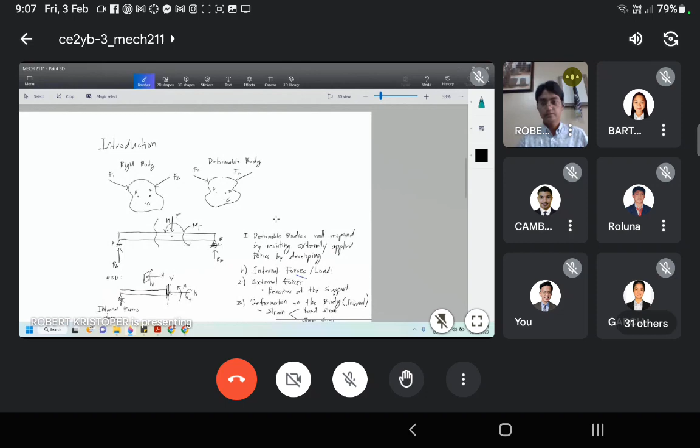Class, are you seeing my presentation here already in Paint? Class, can I have confirmation? Anyone, can I have confirmation? Are you seeing this presentation in Paint? Yes, sir. Yes po. Okay, so now for an introduction,

last semester you had the course Statics of Rigid Bodies. Meaning, based on the given forces or external loading applied to the body, we assume that the body will be rigid, meaning it will not undergo deformation regardless of the support condition. When we say support condition, let's say for a truss, there is one - it could be a roller, a hinge, or any pin-connected support, and then it will have a reaction.

And then later on, if you can recall, we compute for the forces acting on the member, which are internal to the member. For a truss, we do the method of sections, so we can make a free body diagram and represent the internal forces.

Now, as in statics of rigid bodies, again, we assume it to be rigid, meaning there's no deformation. So for this figure on the left, these points A, B, and C - meaning if the body is rigid, it will not deform, the location of these points in this certain body will not change.

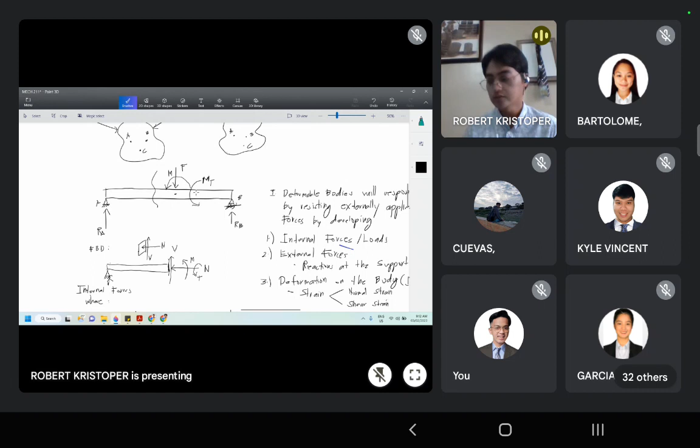It is simply supported with a hinge or pin here, and a roller on the right, at point B. Now class, if it is loaded with different types of loading or externally applied forces, for example, meron tayong concentrated load of force F here, then meron tayong bending moment here applied at this point, then meron din tayong torsional moment which will be discussed as a separate topic.

So imagine this is the beam. This is the externally applied forces - this is the concentrated load, then this is the bending moment. When you say bending moment, it bends the member. Now when we say torsional moment, represented by M sub T here, it is the twisting moment on a certain bar or body or structure.

Now if we are to analyze the effect of this externally applied load on this structure, ano mangyayari? Siyempre may support condition yan. Magkakaroon ng reaction here, RA and RB. Okay, and still that would be external to this particular body or member here, the beam.

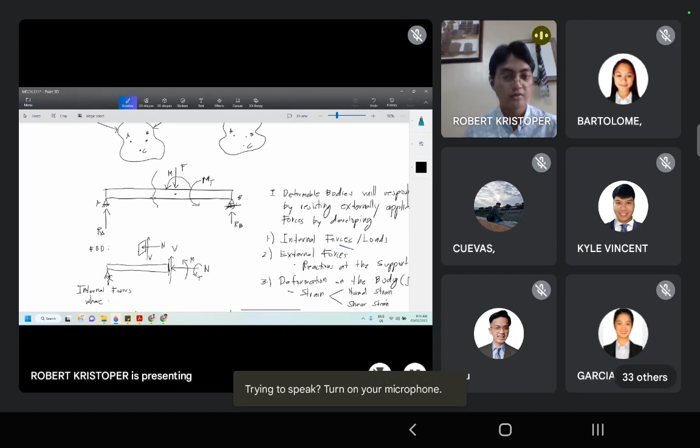Now if we want to know or represent the internal forces acting on the body, then ano ginagawa natin? Doing by producing here a cutting plane. When we do this cutting plane, actually this is a method of section. Ano mangyayari? Refer to this figure below. Okay, if you cut that section here, what you will be seeing is what?

Okay, an axial force here represented by N, or a normal force. So we say it's normal force or axial force, simply normal force, kapag perpendicular yan to the section that we are analyzing. In this case, let's say this beam has a rectangular section. Now let me zoom this one. Then the normal force is perpendicular to the section being analyzed here.

So parang imagine nyo na lang class na magbigay tayo ng isang reference. Let's say itong braso ko - now I will be pinching or I will exert pressure here. So it represents the externally applied forces here on my hand. If we are to check, guys, are you seeing my illustration here, by the way, on my hand? Yes po.

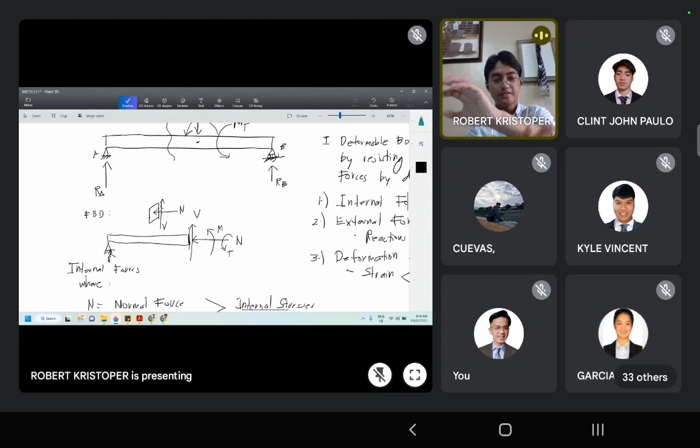Okay, so imagine ito yung external forces applied to this. Let's say ito yung body, okay, this is the member. Now if I press this tightly, if I want to check the effect of this externally applied load on the internal body, I will be cutting this one. So imagine na pinutol ko itong kamay ko. Ano mangyayari? Ano makikita mo? Diba, you will see the cutting section here.

Makikita nyo, pwedeng sumirit yung dugo dyan, may pressure, pwedeng tumagas yung mga laman dyan, and so on and so forth. Meaning, merong effect yung externally applied forces on the internal body, or meaning on the bodies internally.

Okay, so in this case, if we are dealing with any type of structure, for example a beam, if we produce a cutting section here or a cutting plane, then you will be seeing the internal forces effect produced coming from this externally applied load. And as you can see, of course, normal force on the cutted section here, perpendicular to the section, and itong V here, it represents the shear force, or a vertical force that is parallel or tangential with the cross-sectional area.

Now, how about the moments here, represented by - this is bending moment, then this is torsional moment. Go ahead, what is that? Do you have a question?

So, sige, acknowledge. Now again, we're discussing section here with the method of section. Ano makikita nyo dyan? Internally with the member, di ba? Again, bukod sa normal force and the shear force, action, reaction - kung may applied bending moment here, then magkakaroon din ng reaction na magkakaroon ng bending moment at the member internally. And also, kung merong torsional moment here, magkakaroon din ng internal forces with this particular cut section, to resist or develop dahil nga sa externally applied forces.

Okay, so again, the representation here for N is the normal force perpendicular to the section, or the cross-sectional area being considered. Then for the shear force, this is perpendicular, or this is parallel, to the cross-sectional area. And of course, bending moments that you are familiar already.

This is new to you, the torsional moment, which is a twisting moment, or the twisting on any body being subjected to it. So again, these are internal forces, and these forces will produce internal stresses to the body.

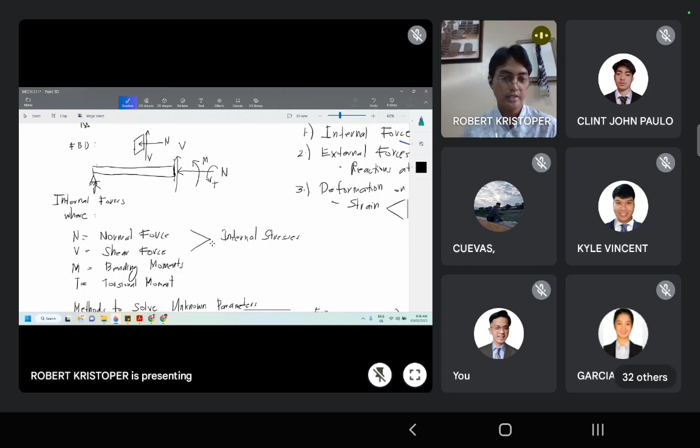So now, how can we solve those unknown parameters? Again, what are the unknown parameters?

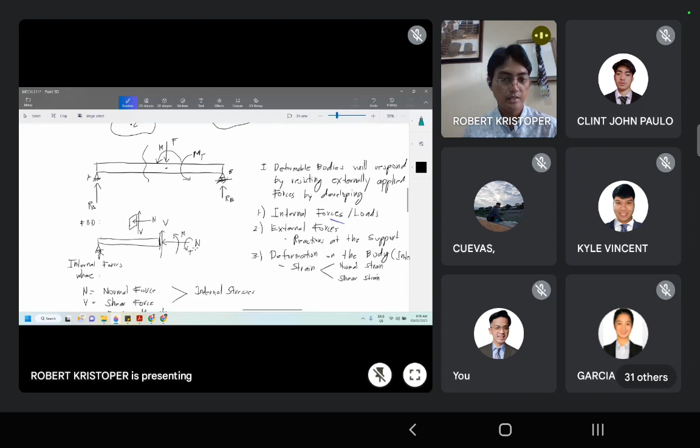Let's reiterate. If a body is subjected to an externally applied load, say for a beam, then depending on the support condition, there will be a reaction, which is still external to the body. If we are to analyze the effect of externally applied forces to the body, we have to draw a free body diagram by producing a cutting section using method of section. Then you'll see the internal forces or loadings on the body represented at the section, or cross-sectional area of any member or body.

Now, how can we solve that unknown parameter? The reaction is unknown, which can be computed using statics or equations of equilibrium. These other unknown forces or parameters, which are internal to the body, can also be solved using equations of equilibrium. What do we have in equations of equilibrium? That would be summation of forces vertical, summation of forces horizontal, and summation of moment.

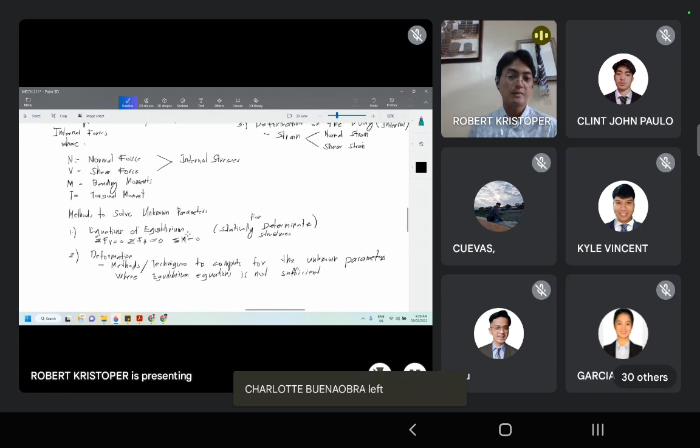Now, if it happens that there are more unknown parameters compared to the available equations, we simply call it a statically indeterminate structure. In most cases in our study of statics of rigid bodies, the structures are statically determinate, meaning the available equations from equations of equilibrium equal the number of unknowns, whether it's a reaction or a member on a truss. They're equal, so it's solvable or determinate.

Now, if there are more unknown parameters than available equations, it will be statically indeterminate, meaning the equations of equilibrium are not sufficient. Here comes the help of our study in mechanics of deformable bodies, when we study deformation. Because if the available solutions from equations of equilibrium are lacking, we have different methods or techniques to compute for unknown parameters considering deformation. So we have different methods in addition to equations of equilibrium.

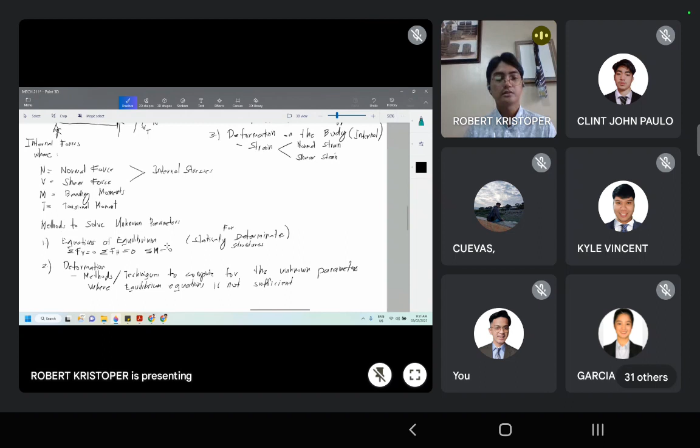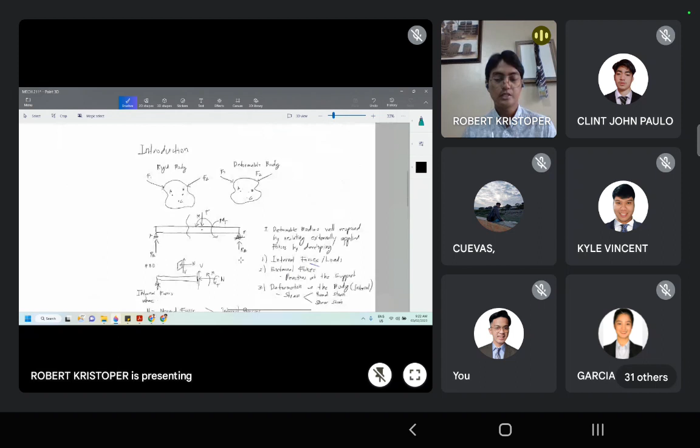That will be the focus of our study, I think around the midterm. But still, if it's solvable with available equations from equilibrium conditions, then we can do that. Now this is only an introduction, by the way, so let's jump straight to our official discussion, which is all about simple stress, particularly normal stress.

Okay guys, are you with me with this presentation for normal stress? Class, can I have a confirmation?

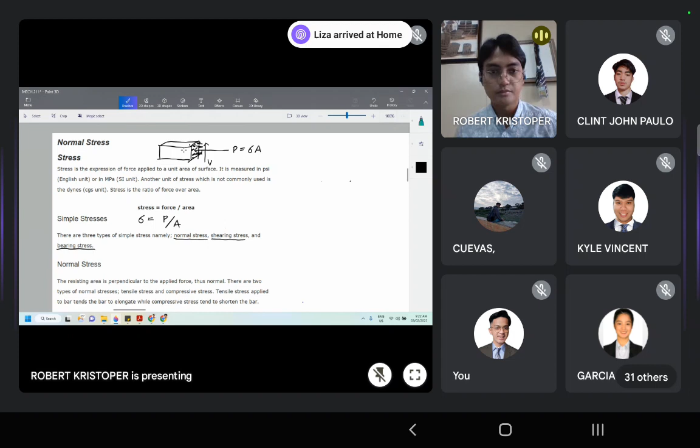So for the normal stress, for example, let's say this is the beam earlier, and then we produce a cutting section. What you'll see there is a normal force and shear force, typically, unless there's a restriction on the support, and there's a bending moment. But now for the study of normal stress, under simple stress, imagine this cross-sectional area here.

Imagine this is my palm. Again, if this is applied with an axial force, applied to the center or the centroid of my palm, which represents this area, this force is again perpendicular to this area. And also, this is assumed to be applied at the center or the centroid of my palm, or an area, in order to produce equal stress distribution on my palm.

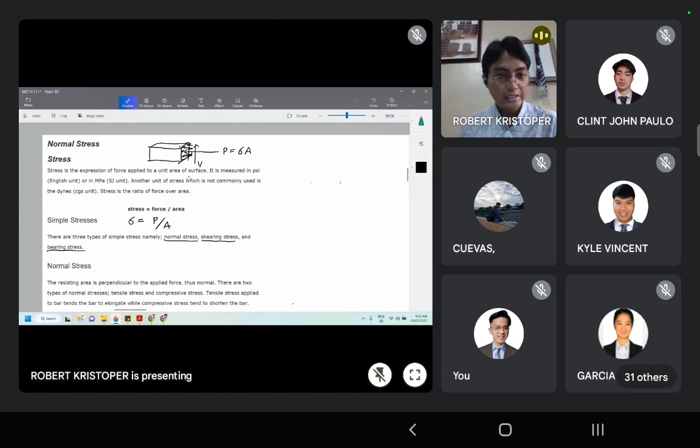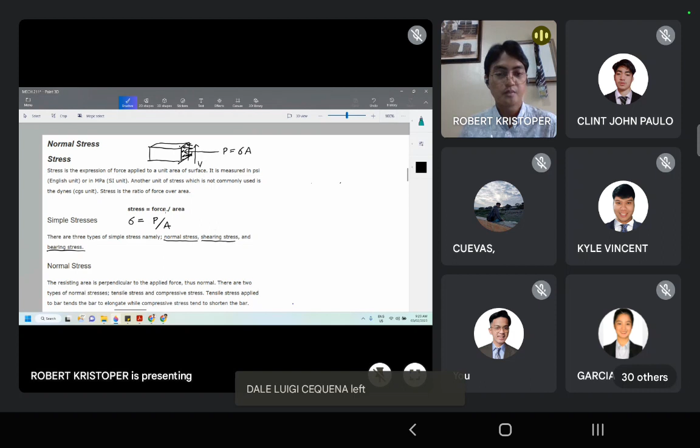Now, with that, the formula under simple stress, particularly normal stress, is what? Stress is equal to force over area, meaning it is a ratio of a force over area. Now, what are the types of simple stresses?

So once again, this is what we're discussing. Normal stress - take note, the force is normal and axial to this particular body, or let's say a member of a structure being subjected to stresses. Now for the shearing stress, the force being considered here is parallel with this area. And for the bearing stress, we will be tackling this one after shearing stress. But for now, let's focus here on normal stress.

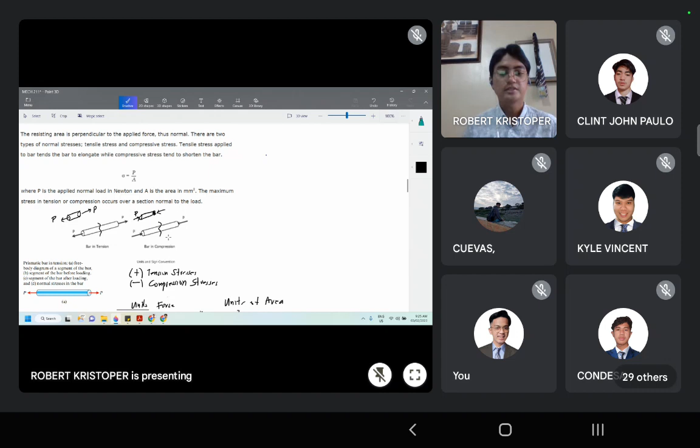We do first unit analysis on stress. Class, what are your known units of force? Anyone? What are the units of force that you know? In English system, what do you know? Newton, okay, what else? Pounds, and kips, and that's the unit of force, right? Newton, pounds, kips. So 1 kip is equal to 1,000 pounds.

Take note, class, this unit conversion - that's for the unit of force. And then we have units of area - square meter, millimeter square, and inches square. That's the typical one, okay?

Now for the units of stresses - again, stress is the ratio of a unit force divided by an area being considered, for an effect of a stress. So that will be unit force over an area. So let's say Newton is the unit of force, that will be Newton per meter squared. And take note, guys, Newton per meter squared represents Pascal, Pa, or Pascal.

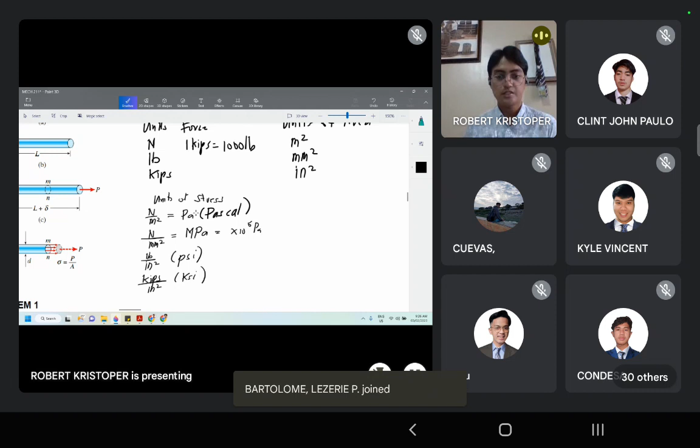Now, Newton per millimeter square is megapascal. And mega, class, in our scientific notation with prefixes - M represents what? The symbol represents times 10 raised to 6, right? So M here, megapascal, times 10 raised to 6 Pascal. So let's say you have 5 megapascal, then that would be 5 times 10 raised to 6 Pascal.

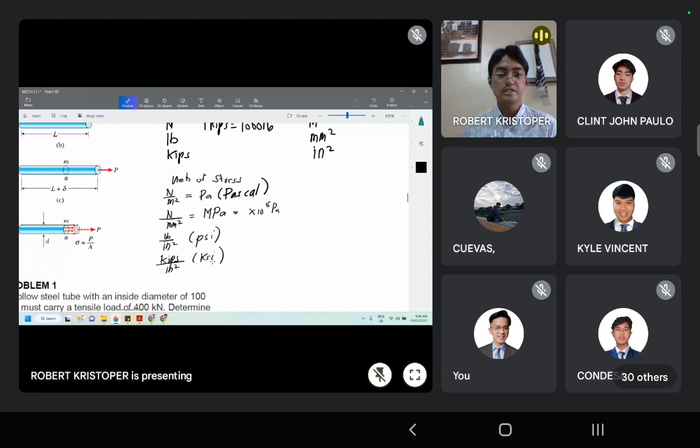Okay, so how about in PSI and KSI? So we have here pounds per square inch - in case your unit, in English system, for stress. Then kips per square inch represents KSI. So in case you encounter those units for stresses.

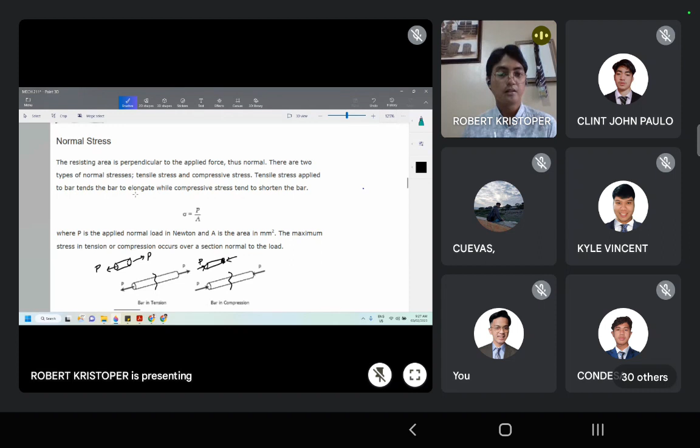Okay, let's continue. Now, the important note to take away here is that under normal stress, the resisting area is perpendicular to the applied force, or meaning normal. So class, take a look at this figure.

Now, let's say this bar is being subjected to two forces on both ends. So if you look at that, it will produce the bar to be subjected to tension. Whereas on this, on the right photo here, if it is applied - imagine this is the ball pen. Of course, if I pull that, that will be in tension. That's on this left figure.

Then on the right - if I compress that, let's say I push this, right? It will - this pen will be subjected to compression.

Now, I know for sure you are familiar with this one on our analysis of trusses, but okay, now if we produce a cutting section here, we'll see this. On this area, there will also be an equivalent force P to react on this externally applied load. If we cut the section here, then it will what? It will have the same value of reaction here on P.

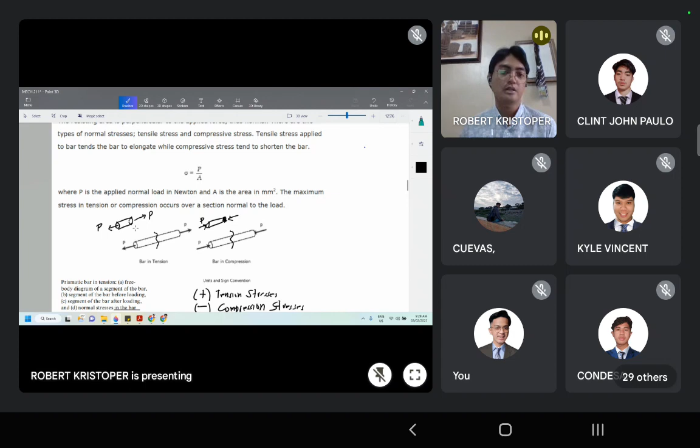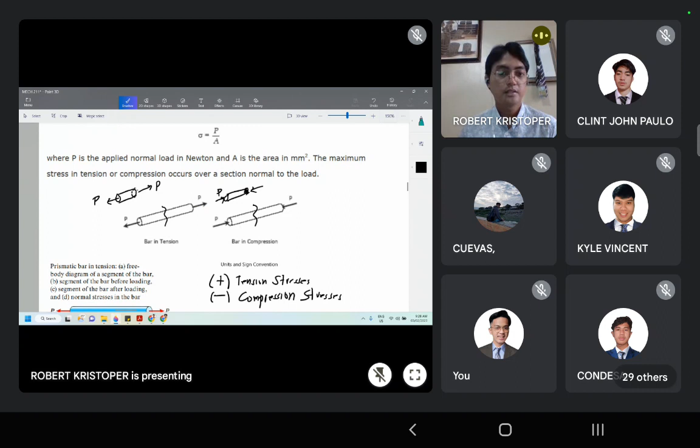So take note, action, reaction - equal. And if you apply equations of equilibrium, summation of force horizontal - this is going to the left, then of course, this is going to the right with an equivalent magnitude of force. Okay, now take note, this force P here is normal to this area being considered, meaning this body is subjected to normal stress. And again, the formula is that stress is equal to P over the area here.

So let's say it's a circle, right? What's the area of a circle? Pi over 4 d squared. What is the value of P here? That's given. Okay, so later we will have an example with this one. Now class, if you are to consider also, of course, as I have told you...

Depending on the applied force, a certain body will deform. Let's say on this bar we apply a pulling force or tensile force here at both ends. What will happen? This bar could elongate - this represents the deformation here. L represents the original length, and delta represents the additional length produced by this externally applied force.

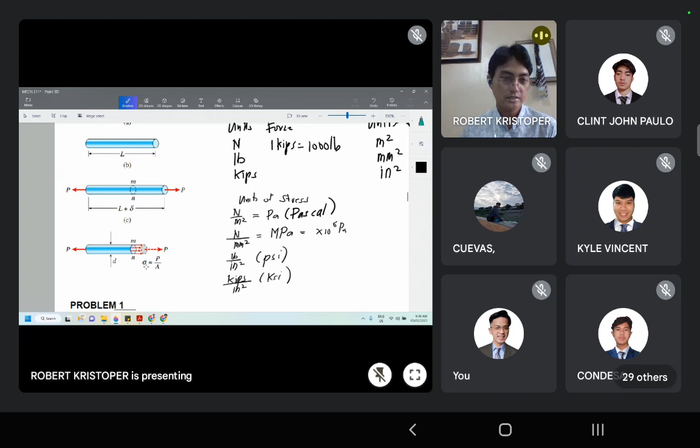Once again, if we produce a cutting section here using methods of section, you will see the force of section being considered. With this externally applied load, considering the left portion of a free body diagram, internally the member or body develops a reaction. In this case, it is equivalent to this particular magnitude of P, and this P is internal to the body. And normal stress is equal to P all over A.

Okay, so let's have an example to apply these concepts about normal stress. Class, are you with me with problem number 1? Okay, so prepare your calculator. I will be asking your participation.

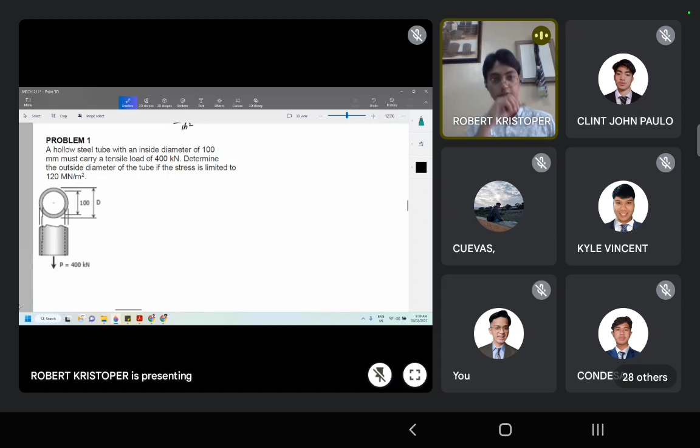For problem number 1, a hollow steel tube with an inside diameter of 100 millimeter carries a tensile load of 400 kilonewton. Determine the outside diameter of the tube if the stress is limited to 120.

What does M stand for, class? M stands for mega, right? So this is 120 megapascal. And 120 megapascal - what does that represent in units? Unit force per area? 120 what? Newton per what, as the denominator? 120 what, class, as the denominator? Millimeter squared, sir. Okay, anyone can participate, class. There's no incorrect participation, so don't be shy to participate. So 120 Newton per millimeter square.

So that's correct. Now, what we need is that the units should be consistent when we substitute into the formula. Again, what's our formula for normal stress? Take note, this is the force actually loaded and the area being considered.

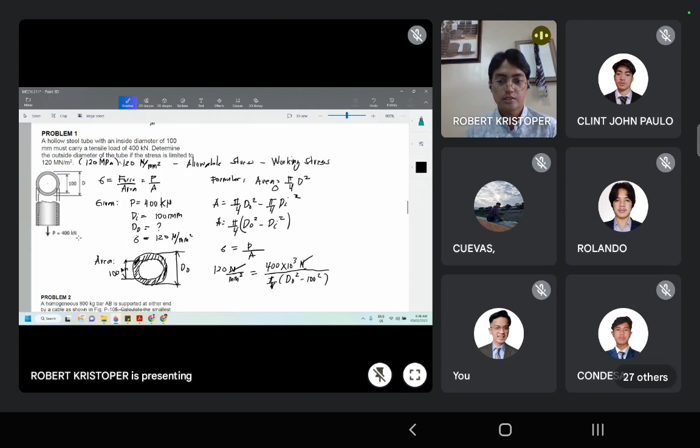Now class, you can just do a direct calculation, you can use shift solve, but let me simplify this. I mean, let's arrange this one so you can see the complete solution.

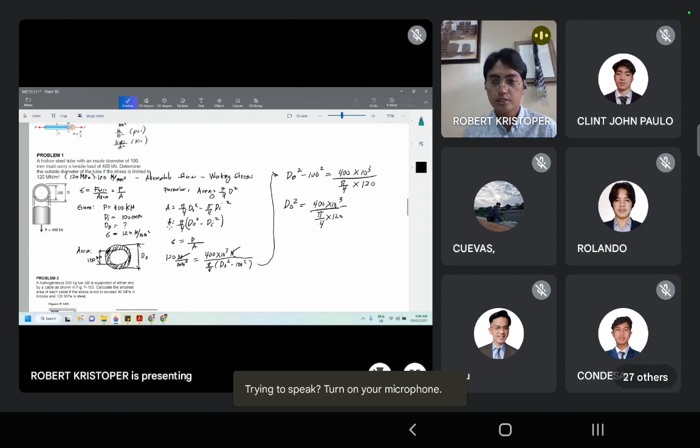Cross multiply. Let's separate the unknown, which is D sub O. That will be D sub O squared minus 100 squared is equal to 400 times 10 raised to 3, divided by, of course, the pi over 4 remains there, times 120. Then D sub O squared, that's all that remains on the left hand side of our equation. That will be 400 times 10 raised to 3 over pi over 4 times 120. And transpose this to the other side of the equation, it will be plus 100 squared.

And square rooting both sides, that will give you already the value of the unknown diameter here, or the outside diameter of the hollow tube. Guys, can you give me the value of D sub O here? By the way, you can right away do shift solve if you want, using the power of your calculator. But I'm considering this one already a solution in case that's required. But it's easier to compute this way.

Since it's squared, calculators sometimes have difficulty when there are squares or cubes in the unknown, because the analysis is no longer linear. Okay, so can you give me the value of the diameter here in 2 decimal places?

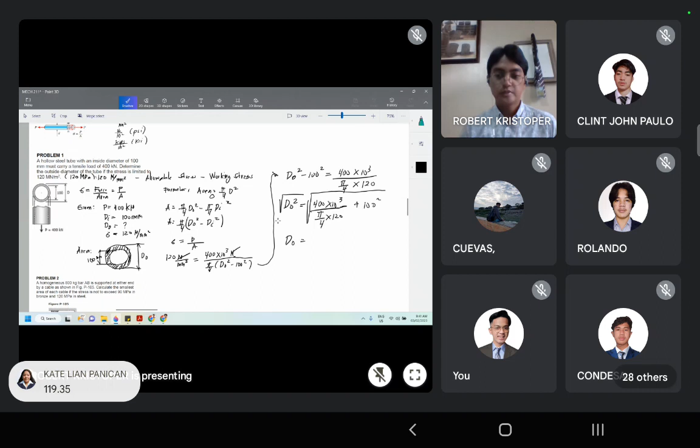Guys, what did you compute? Go ahead. How much? Can you speak? 100? Or can you verify this? 119.35? Same? Anyone? Yes.

Okay, so 119.35 millimeter. Now class, what is the conclusion here? That if 120 megapascal is the allowable stress of this hollow steel tube, meaning if you are to give this to manufacturing, what diameter or dimension of the tube would you specify for fabrication? So at least, it should not go below 119.35. So let's say this will be manufactured, that should be at least 120 millimeter and more.

Because if that becomes smaller, what will happen? The smaller the area, what happens with this equation? The stress becomes larger. So meaning if that becomes smaller, there's some possibility that this hollow tube will fail if you reduce the outside diameter, since the 100 millimeter inside diameter is already given. So again, the takeaway here is that the allowable stress is also the limiting stress or the working stress that we are referring to when we are dealing with the strength of this particular material.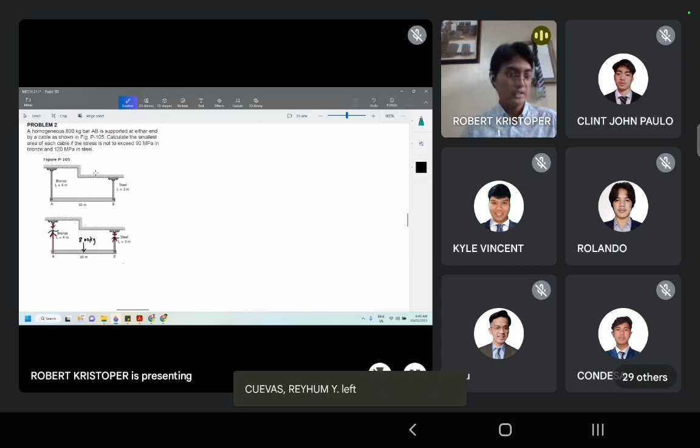Class, can I have confirmation? Go ahead, can you confirm? Dito po, sir. Okay, so this is problem number 2 already.

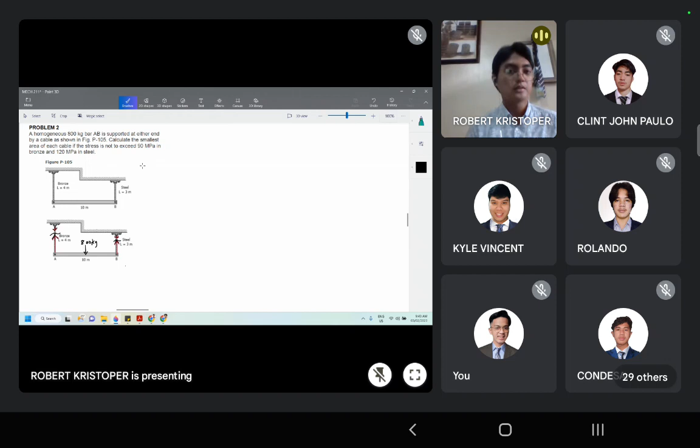Let's continue. A homogeneous 800 kilogram bar, AB, is supported at either end by a cable as shown in figure P-105. Calculate the smallest area of each cable if the stress is not to exceed 90 megapascal in bronze and 120 megapascal in steel.

So again, class, this is the homogeneous bar supported by this cable. This one is made of bronze, then this one is made of steel. And again, the strength of bronze and steel are different, meaning the allowable stress, or the limiting stress, is limited only to 90 megapascal for the bronze and 120 megapascal for steel. The given lengths and dimensions are also there.

Now, how can we solve this particular problem? What we're looking for here is the diameter for this cable to carry this bar with a given weight of 800 kilogram, and it should not exceed its allowable stresses which are 90 and 120 megapascal. Because if it exceeds the allowable stresses, what will happen?

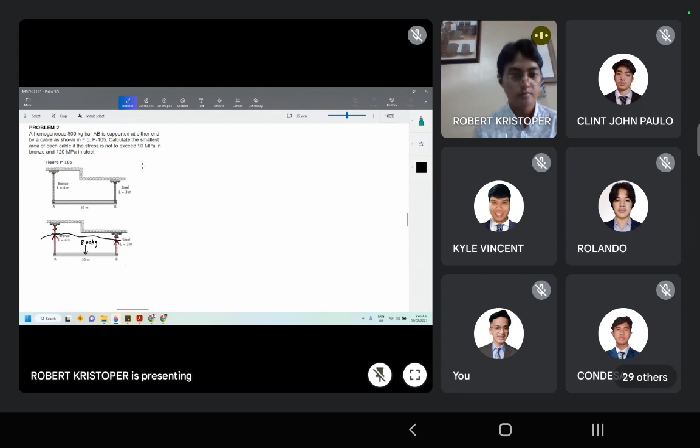So, of course, to see the internal forces acting on the cable, we produce a cutting plane here, or a cutting section, using the method of sections, and we interpret that into a free body diagram. Let's say I introduce a cut here, so this is what remains below. Let's reproduce a horizontal cutting plane here, and then what you will be seeing are the internal forces acting on the member, and then for the cable as well.

Of course, action-reaction, class. This bar AB has a weight of 800 kilogram, located at the center of bar AB. So when we cut this one, we will see the internal forces acting on the member, which is the cable. And then, of course, if we transfer this force, by action-reaction, opposite direction but equal in magnitude, this particular tension equates also to the tension applied on the support.

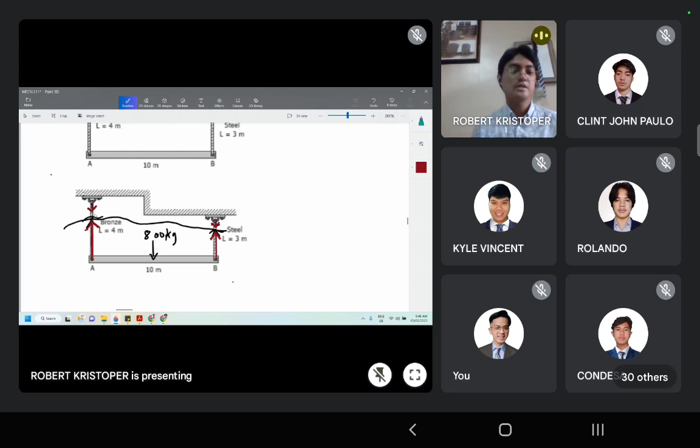So now we will be considering only the lower portion of this particular cutting plane. We draw the free body diagram. Okay, that's our free body diagram. I hope you already know how to draw a free body diagram.

So we consider the lower portion of the cutting plane. Let's draw the bar here now, I'll just make it linear. This is bar AB, let's say this is point A and B. Then, of course, we have to represent the weight of the bar, downward, since it's weight, and this is W.

Now, class, take note, the given here is in kilogram. And we all know that the formula for weight is mass times the gravitational pull, or simply the acceleration due to gravity. Take note, force is equal to mass times acceleration, and weight is a type of force.

So let's convert this weight. This is 800 kilogram times the acceleration due to gravity. What's the value? 9.81, with unit meter per second squared. Now let's compute this: 800 times 9.81, that will give you 7848.

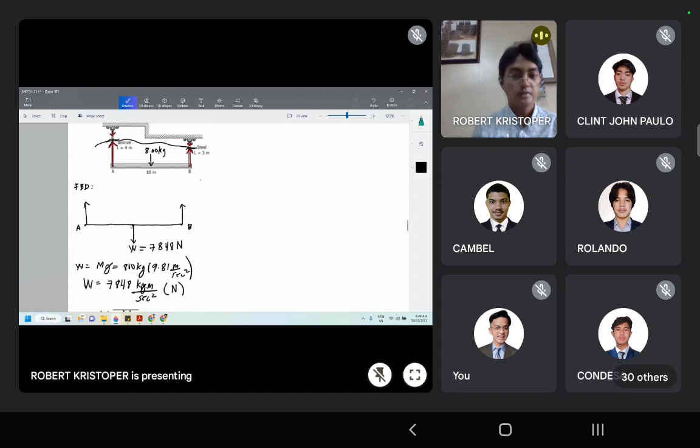Then let's say cable, wala naman nakalito na. Let's say, lagay natin tension at cable. Bronze na lang, TB, represent sa bronze. Then, tension acting at the cable with a material of steel, so TS na lang. Okay?

Now class, how can we compute this tension forces? What equations can we apply? In statics, ano yung ating equations available? Equations of equilibrium po. Okay, equations of equilibrium, that would be summation of forces or summation moment.

Now, as if we will be doing summation of forces, of course, vertical, di ba? We have two unknowns, so we cannot solve directly, no? Yung value ng tension or T sub B, tension at bronze cable, and consequently tension at the steel cable. So what we can do is we can do summation moment at a point.

If we do summation moment at point A, we can solve T sub S. But take note guys, nakita nyo, symmetrical yan, no? Yung loading here. So we can just simply assume na itong T sub B and T sub S ay paghahatian niya yung weight, or meaning bubuhatin nilang equally itong 7,848 Newton weight. But to verify that case, para may method tayo, we apply the equations of equilibrium.

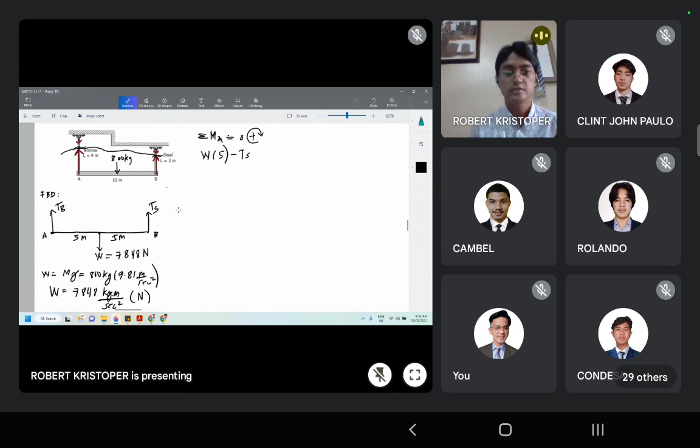Okay, now how about itong T sub S? Positive or negative? Itong T sub S, moment about point A. Negative. Yes, tama, negative, no? So negative T sub S. What's our moment arm to point A? This will be what?

10 po. 10, tama. And now, my question is, ito bang T sub B ay may moment effect about point A? May moment effect ba itong T sub B about point A? Wala po. Wala, di ba? Kasi unang-una, wala naman yung moment arm, no, coming from point A. So hindi yan magpo-produce ng rotation, or hindi yan magpo-produce ng moment.

Okay, and also, in concept, anything that pass through a given moment center, any force, will produce no moment effect. Kasi nga, on the first hand, wala yung distance from that point, or it doesn't have a moment arm, okay, to produce a certain moment or bending moment or rotation.

Okay, so let's equate this one to 0, but of course may value tayo ng weight which is 7848 times 5 minus T sub S times 10 is equal to 0. Now I will transpose T sub S, that will be T sub S times 10 is equal to, or let me write it this way, 10 T sub S na lang, positive na yan is equal to 7848 times 5.

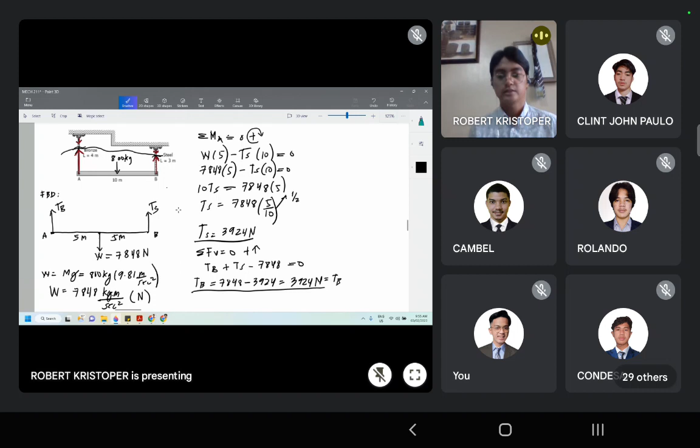So now this tension acting at the cable is internal to the body. We saw that through the cutting plane, introducing this free body diagram.

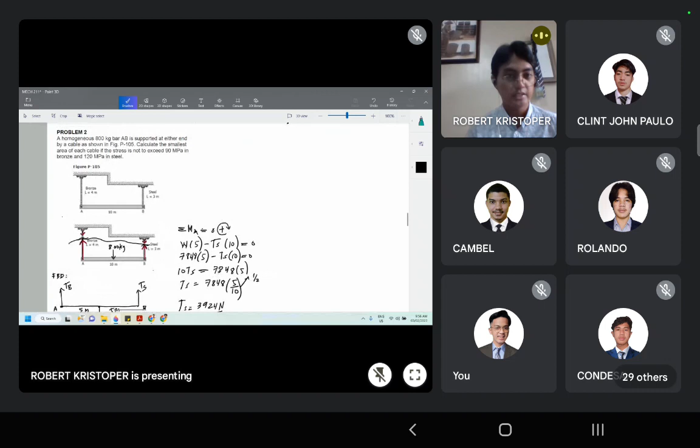Now we can already compute for the smallest area of the cable, given the allowable stresses. So what are the other given? Let me zoom this out a little bit.

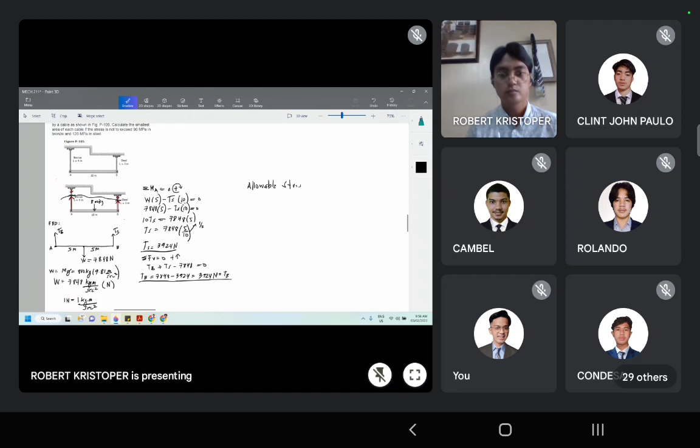So the allowable stress slash limit. Stress sub bronze, sub B, is equal to 90 megapascal. Then sigma sub steel is equal to 120 megapascal.

Now for bronze cable, what are our other given here? Stress is equal to P all over A. Then, cross multiply, P is equal to stress times area.

So that's what we chose. You can just do it linearly on the calculator when inputting. So P is equal to stress times area. Then the given P is what? This is the force acting at the cable, so this will be what?

This is T sub S, or rather T sub B. T sub B is equal to this stress, the allowable stress for bronze, times the given area. This is A sub B, the area required. Given these allowable stresses or limiting stresses for the bronze cable, that will be T sub B is...

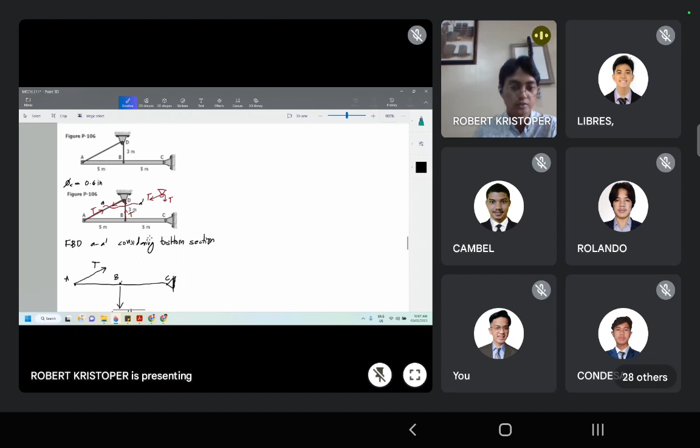Okay, and then of course let's draw the force, now the tension force that represents the internal effect acting at the cable. So that will be T, and also here at point B, this is also T. Right. Now, what else?

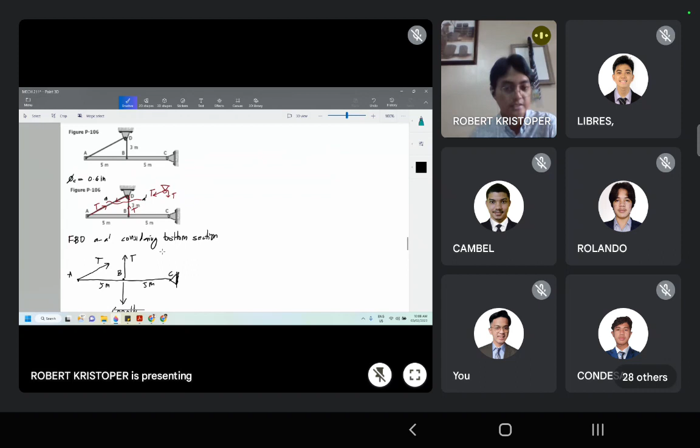What do we need? Now, of course, this is dimension 5 meters. And now class, if you will be applying already equations of equilibrium, we will be needing what on this force, the inclined T. Kailangan natin ng slope triangle. So we can just use the components for this particular tension force.

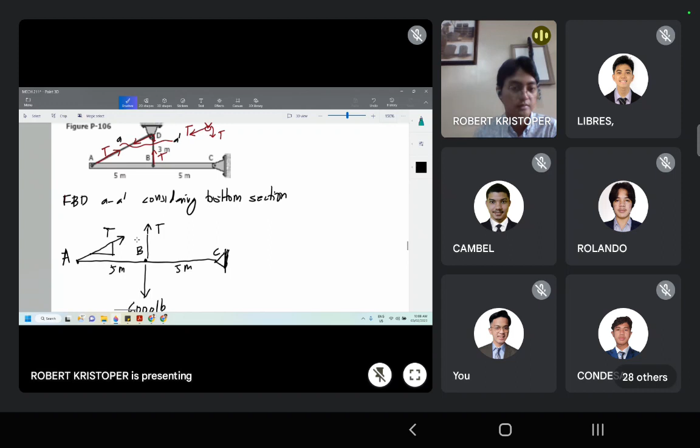So anong slope triangle natin dito? Can you give me? This is what? Yung vertical component ng slope triangle based on the dimension. Ano to? 3 po. Okay, how about itong horizontal? 5. Tama. Okay, this is 5. And then class, can you give me the hypotenuse of this slope triangle? Ilan yan? Square root of 34. Okay, very good.

Now, class, you know that this has components, right? Let's include it for review, but this should already be automatic when you write an equation. This is the vertical component, this is the horizontal. So the vertical component of the inclined T here, what will that be?

This is T sub V, let's put T sub V. And for the horizontal, T sub H.

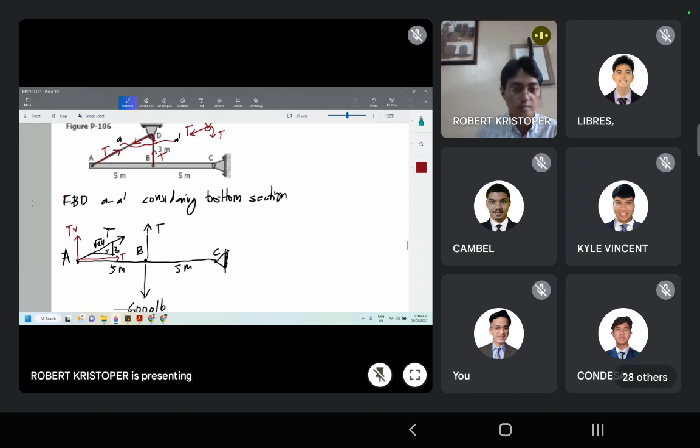Now class, if you are to represent T sub V in terms of the value coming from T, what factor or multiplier do we use on T? That will come from the force triangle. What ratio is equal to T vertical?

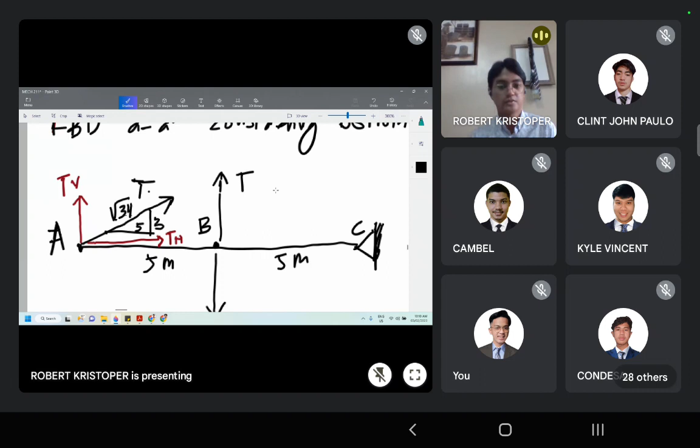So now, for T sub V, what is our factor here for T? Go ahead, what is it? The factor - is it T sub V over hypotenuse? Yes, correct. So you'll use this slope triangle here.

T sub V, you know, it's just ratio and proportion. The vertical component of T is just, using the factor from the slope triangle, the vertical component which is 3, right? 3 over square root of 34. Correct, multiplied by T. So that's already the component T sub V.

Then how about T sub H? Using this slope triangle, that will be - go ahead - 5 over square root of 34. Okay, correct. So that's our multiplier on T, meaning it's already a component of the value of T, using this particular factor from the slope triangle.

Okay, so now let's go straight to the computation, so we can compute the value of T here, the tension acting at the cable, and later compute the magnitude of the stress given the area of the cable. So class, can we solve this value of T using the equation of equilibrium without computing the reaction here?

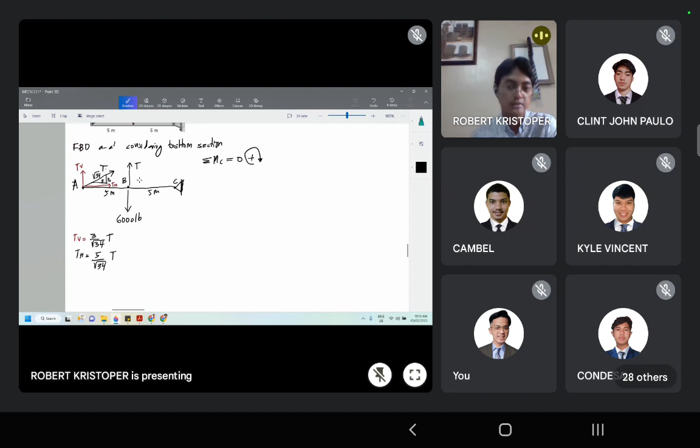Positive again in the clockwise direction. Now class, summation of moment about C - what is the moment effect of the 6000 pounds weight here? What is the direction of rotation about point C - clockwise or counterclockwise? Clockwise, sir, about point C.

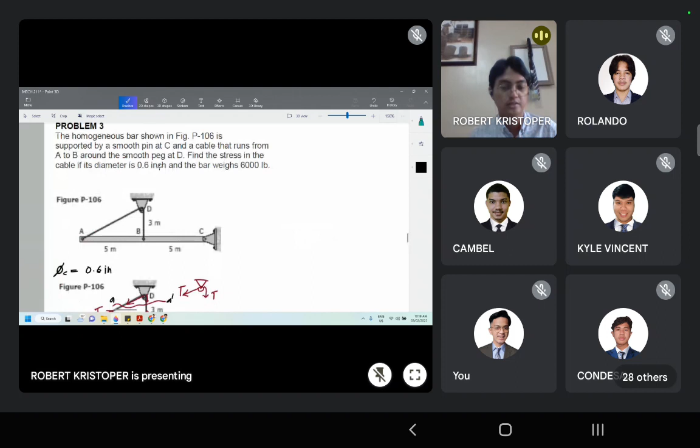All over. Ano yung area given kanina? This is 0.6, given pala yung diameter. So area is what? Pi over 4 d squared. So that will be, okay, let me zoom this one again. Pi all over 4 times 0.60 inches squared na.

Now, can you give me the stress in terms of pounds per square inches? Area ng circle yan. Take note, ang cable ay circle, no? Ang cross section. So, given diameter pi all over 4 d squared. Can you give me the value already? What's your answer? Class.

Participate para matapos agad natin, no? Okay, I want a participation. So, somehow I know you're solving also. Guys, anong answer? Ano yung value ng stress here? Anyone? Okay lang kahit mali yung sagot or what? 10,000? Parehas ba?

Opo, sir. 458.7. 70 or 60? 70 na. Tama ba? Or 68? Well, similar lang naman halos ano, that's considerable na. Okay, ito na lang ilalagay ko. Pero at least parehas tayo na 1, so that's pounds per square inches. Now class, ano tong pounds per square inches? Ano to? PSI, di ba? So PSI yan also, in abbreviation.

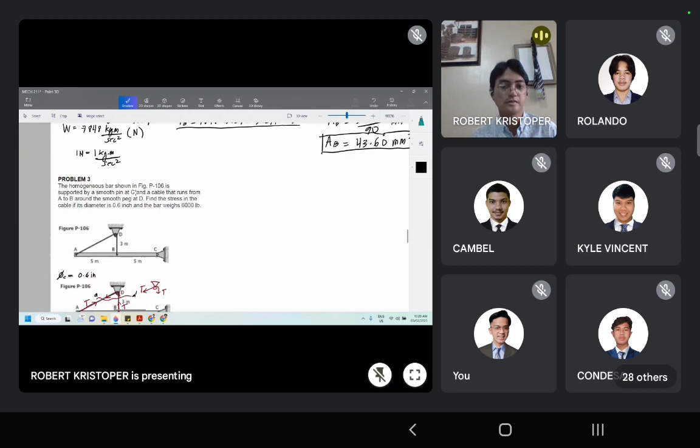So, any final answer here. Okay, for this problem. Okay, so let's go next to an example para ma-apply ito ng mga problems here. So for problem number 4, guys, are you with me with problem number 4?

Yes po. Okay, so a rod is composed of an aluminum section rigidly attached between steel and bronze section, as shown in figure P-107. Axial loads are applied at the position indicated. Now, if P is equal to 3,000 pounds and the cross-sectional area of the rod is 0.5 inches squared, meaning pare-pareho lang yan, kung nagkatagan, pare-pareho lang yan ang cross-sectional area, 0.5 inches squared. And then now, determine the stress in each section. Take note, we have three materials here. This is aluminum between steel and bronze, okay? And given the location of the forces P here, a single force P equates to 3,000 pounds.

And take note class, di ba? 1,000 pounds is equal to 1 kips, right? So meaning 3,000 pounds is equal to 3 kips, right? In terms of kips or K.

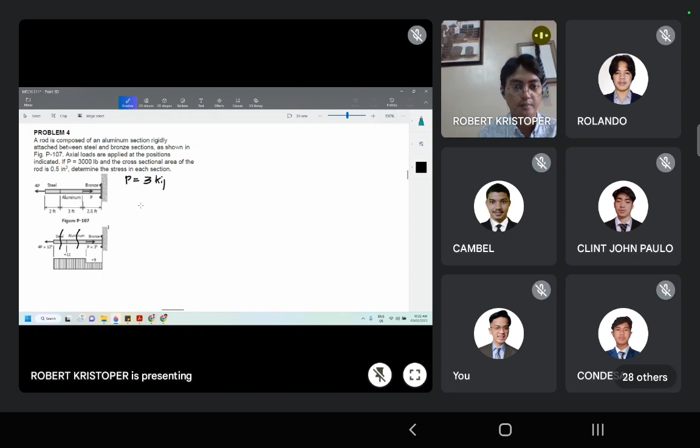So 3 kips or 3K. Now, referring to this figure, how can we solve for the stresses on each section? Of course, we will be cutting up a section to see the force acting internally on the member.

Let's start with the steel section. If we cut this and consider the left portion of the body, we can draw a free body diagram. Let's say this is my cutting section here, cutting section AA, or just A for later. So, FBD, or free body diagram, at section A.

Left section. If we consider the left section here, what do we see? This will still be steel. So at the cutting section A, this is a steel section. What you are seeing is the external force of 4P. And 4P is 4 times 3, that would be 12 kips. So 4P here equals 12 kips, let's just call it 12K. Now class, if you cut this section, it means there is an internal force acting on this member.

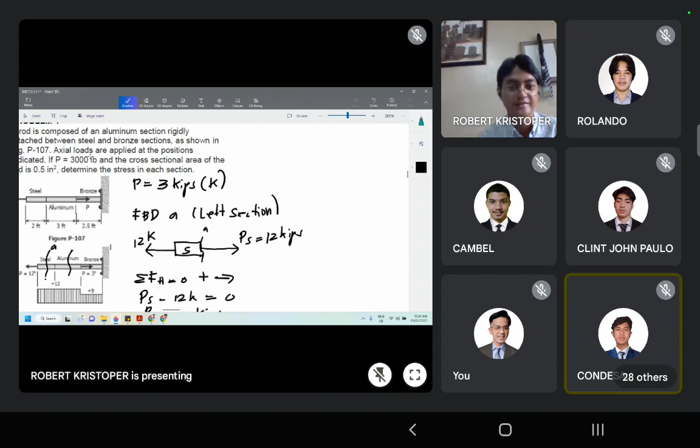Can you give me the value? 12 divided by 0.5. Sir, do we still need to get the area? It's given, the area, the cross-sectional area. It's not the diameter. You might have thought it was the diameter, right?

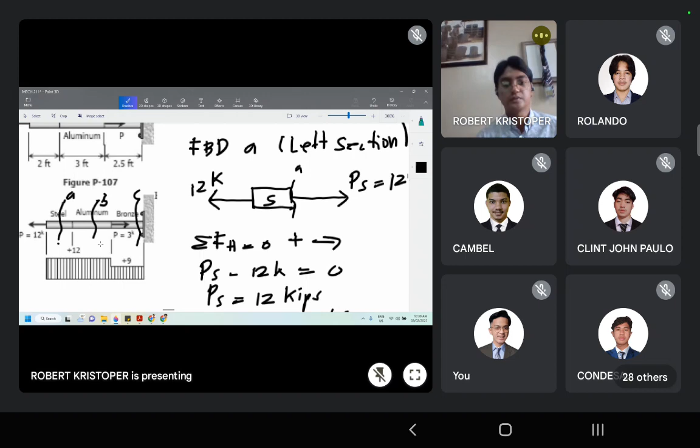So let's draw this into a free body diagram, FBD, point C, cutting plane C at the left section. So that will be what? Of course, the steel is whole, the aluminum is whole, and here we cut somewhere in a portion of the bronze. This is cutting plane C. And then let me write it here: steel, aluminum, and bronze.

Okay, so what do you see there, di ba? Let me change the color so you can see. The external applied force is still one, this is 12 kips still, di ba? 4P, so 4 times 3, 12 kips. And we have a force acting at the junction between the aluminum and the bronze, right? So how many is that, class?

Can you see this one? This is P, right? So let's place that. The force acting at the junction of bronze and aluminum, so what is that? Let's place it here, this is P, right? And a single value of P represents 3 kips of magnitude. So this will be 3 kips, right? This particular force is 3 kips.

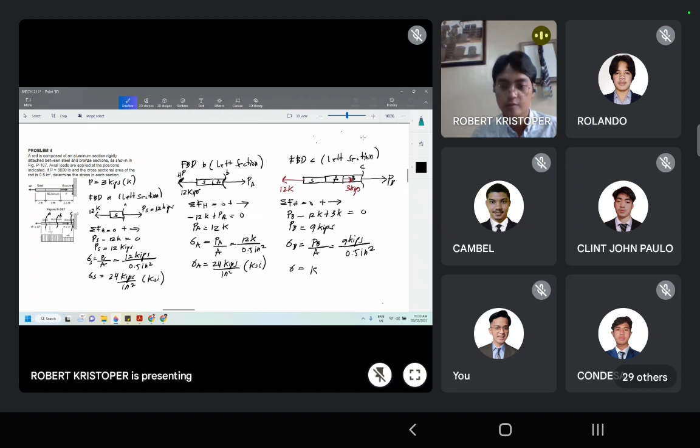So again, that's internal to the body, 9 kips. Now, stress acting at the bronze will be P sub B over area, so 9 kips divided by area of 0.5 square inches. And the stress experienced at the section in this particular material of bronze is, can you give me, how much is this class? 18 kips per square inch, KSI for short.

So here are the answers, right? So these are the stresses in each section of the bar here. Now class, take note, if you see here, we have a graph. This is what we call the axial force diagram.

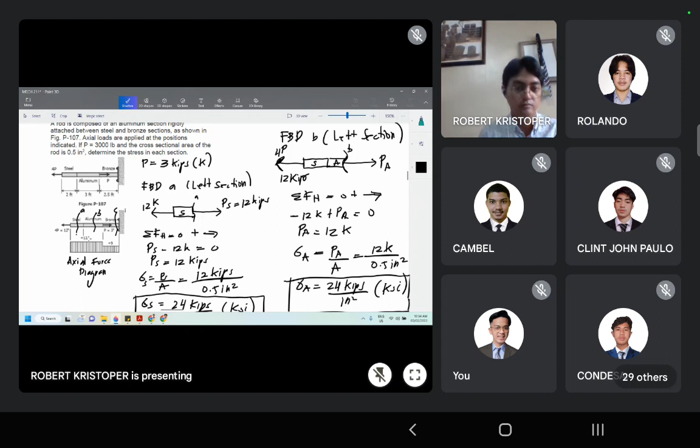Now, ang assumption natin sa sign dito, kung bakit positive yan, is that I forgot to mention na, let me go back here. We have the unit convention, aside from the units na nandun sa atin kanina ng force, area, and stresses. For the convention naman, anong sign convention? Positive for tension and negative for compression. Okay, so let me go back here.

So for the axial force diagram, kung makikita ninyo class, referring to this FBD here. Itong P sub S, tension yun or compression? Class, tension or compression? Okay, this is the section here, this is pulling away. Tension or compression? Tension, tama di ba? Kapag sa truss din, from the joint, kung pulling away yan, tension. Pag going into the joint, this example, this is the current section, going away from the section, this is tension, going into the section, this is compression.

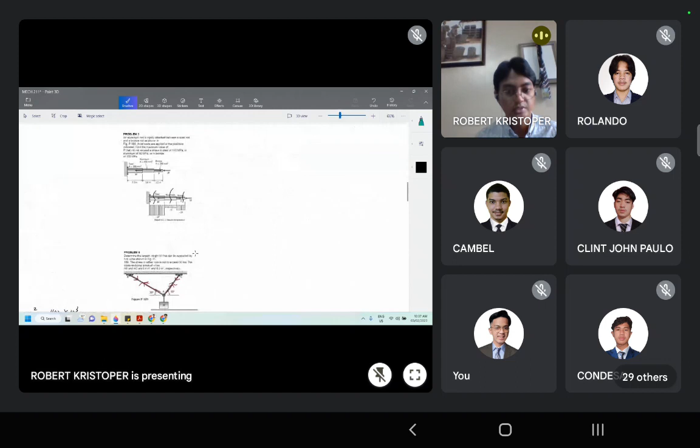Now let's go to problem number 5 and 6, and also 10. So I think kaya natin to bago mag-11. Thus, I need your quick participation para ma-hit natin na matapos ng 11. So press your calculator, I want participation. So, problem number 5.

An aluminum rod is rigidly attached between a steel rod and a bronze rod as shown in figure 108. Now, axial loads are applied at the positions indicated. Okay let me zoom this in more. Find the maximum value of P that will not exceed a stress in steel of 140 megapascal and in aluminum 90 megapascal, or in bronze of 100 megapascal. So again, this is the allowable stress, or the limiting stress, or the working stress, for this material, for the bar or rod.

So ang arrangement natin class is that, steel, siya yung naka-attach dito sa wall. Then aluminum sa gitna, then bronze. Given yung area, cross-sectional area, 500 millimeter square, 400 millimeter square, and 200 millimeter square para sa bronze. Then again, itong forces P dito represents the external forces applied to the rod. Okay, so now how can we compute kung ano yung maximum value of P that this rod can handle or can experience without exceeding these stresses.

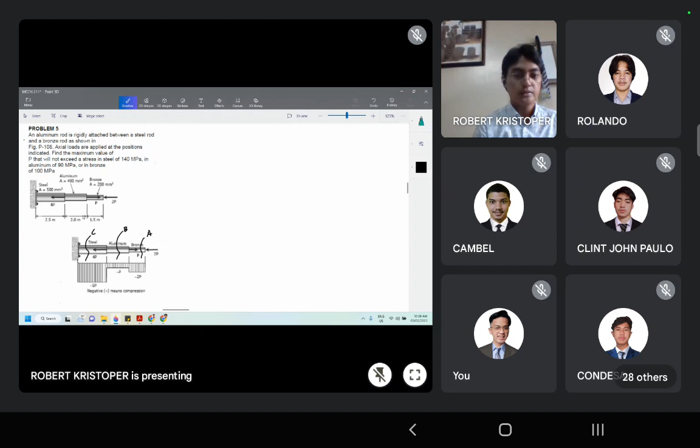Correct natin. B na lang to, then aluminum A, then S. So this is the cutting section. Free body diagram. B, right section. Okay, so ano makikita nyo with the right section? Cutting section B, then this is for the bronze. Then this is 2P, right? Ito yung externally applied load.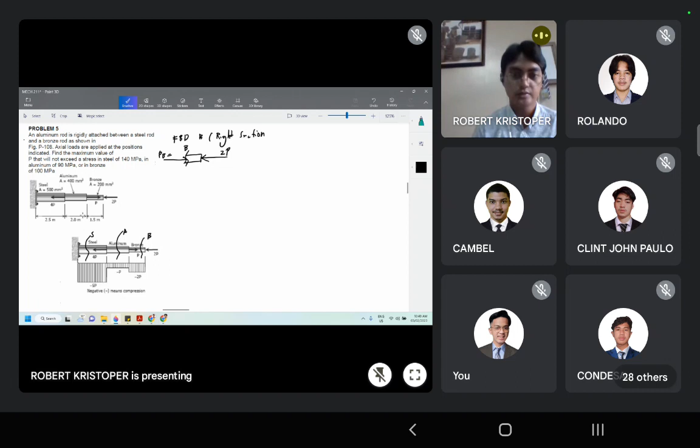This is 2P. Now class, kahit hindi na tayo summation force horizontal, applying equation of equilibrium, we all know already that the internal force acting on this section of the bronze is equal to also 2P, right? So action, reaction lang, yan, and then 2P yan. Okay, now class, my question is: is this a compression here or tension for P sub B?

Class. Compression po. Okay, so P sub B is equal to 2P in compression. So, compression portion. Now, applying stress formula here, given naman yung area ng bronze here, 200 millimeter square. So area is 200 millimeter square. And given stress is, allowable stress is what?

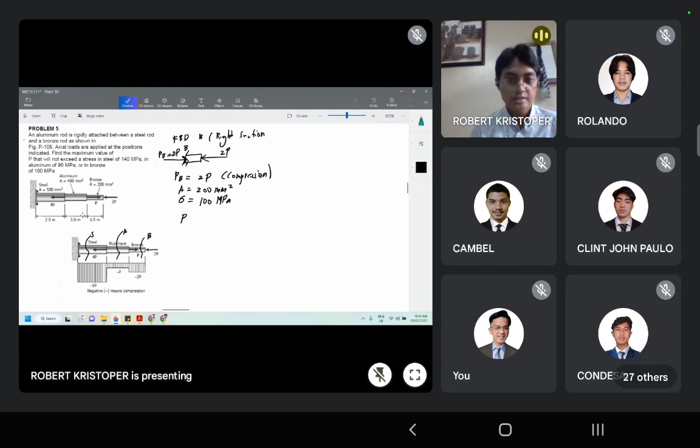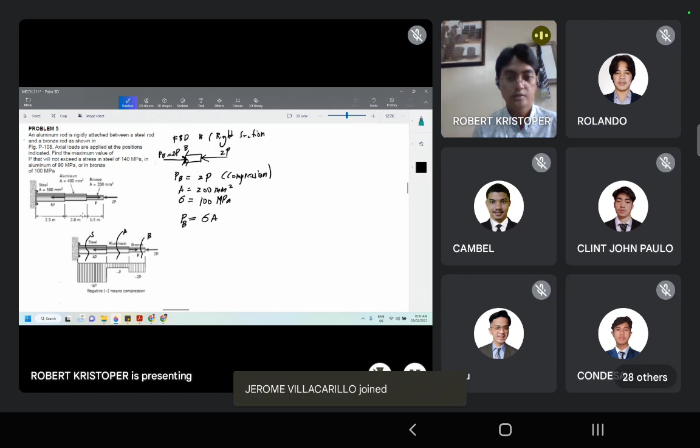It should not exceed for the bronze, this is 100 megapascal, MPa. So now class, okay, ang formula is stress is equal to P all over area, but also P is equals to stress times area. So P, anong pin natin here? That will be P sub B. Okay, so that will be 2P is equal to stress 100 megapascal, which is 100 Newton per millimeter square for the bronze, yung allowable stress. And then the area given here is, for the bronze, 200 millimeter square. Okay, so 200 millimeter square, this will cancel out.

Okay, 2P is equal to it will be 100 times 200 divided by 2. This is in Newton. Anong value ng P here class? Can you give me? 100 times 200, 10,000. No? So this is 10,000 Newton. So meaning, yan yung kayang dalhin ng bronze bar here, given allowable stress of 100 megapascal. Okay, so 10,000 Newton. Lagyan natin P sub B to represent for the bronze.

Now for FBD naman, on the cutting section of at point A here, for FBD A, then again right section for consideration. So this is the cutting section, not the subsection. Considering the right portion here, that will be, of course, this is the aluminum. Then bronze, buo yung bronze, diba? Hindi naman tayo nag-produce ng cutting plane. And ano nakikita natin dyan? Merong 2P kanina, externally applied load 2P, and externally applied load at the junction of bronze and aluminum.

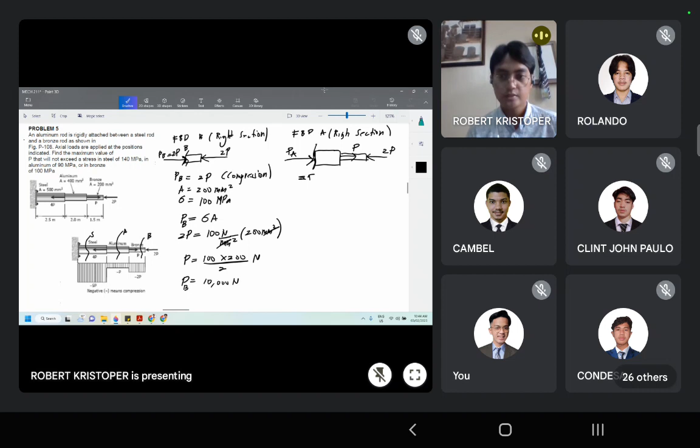This is P, right? So, and then, of course class, kung 2P ang going to the left, then may going to the right. Ano yung resultant nito? Ilan yan? Meron tayong sobrang 1P going to the left. So, meaning kung going to the left yan, sobrang ng 1P, I can assume that the direction of the internal force acting at this section is what? Going to the right. So, this is P sub A na lang for the aluminum. So, in this case, para di kayo malito, summation force na kayo, horizontal is equal to 0. Positive going to the right. Okay, P sub A. But obviously, 1P yung value niya. Kasi ang resultant itong dalawang to, 1P going to the left, so meaning P sub A is 1P going to the right. Pero yun nga.

Okay, P sub A plus P minus 2P is equal to 0. Then P sub A is equal to simply P minus 2P, that's negative P, transpose to the other side, that's positive P. Okay, so P sub A is equal to P, or simply 1P. Now, applying the stress formula again, P sub A is equals to stress times area. Okay, and P sub A has a magnitude of 1P, which is equal to stress, allowable stress for, take note, this is aluminum.

Okay, on this cutting section. Then this is aluminum and steel lang sa isa. So, ang aluminum, ang allowable stress is, ilan to? 90 megapascal. So that will be 90 Newton per millimeter square times the area, which is given here, area for the aluminum is 400 millimeter square. So cancel yung millimeter square here. Anong value here ng P? This is 36,000? 36,000. Okay, 36,000. 36,000 Newton. Okay, this is P sub A.

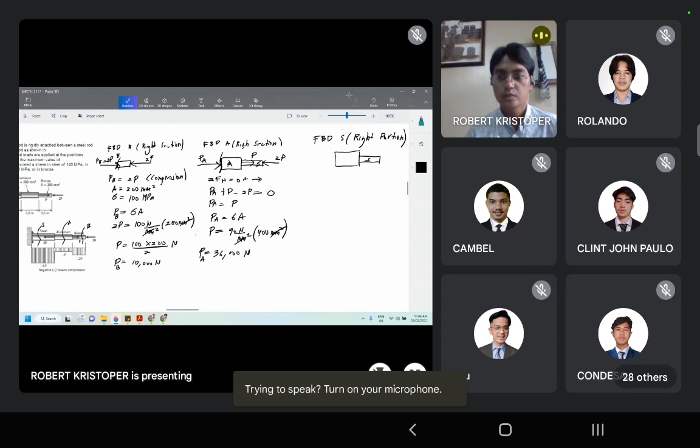Now, continue natin yung pagsuot here. So, okay, ito na lang class, nakita naman dito. So, okay, I think this piece will work. So, FBD at the cutting plane S here, for the steel section. So, considering all, again the right section or portion. Now, that will be what? Of course, buo yung steel, yung length ng steel, and then there's aluminum. Then also, ito na yung sa portion ng steel. Right, the cutting section here.

Now, of course, lagyan natin yung mga externally applied load, which is 2P. Then this is P. Okay, so borin na natin to para P na lang ilagay natin.

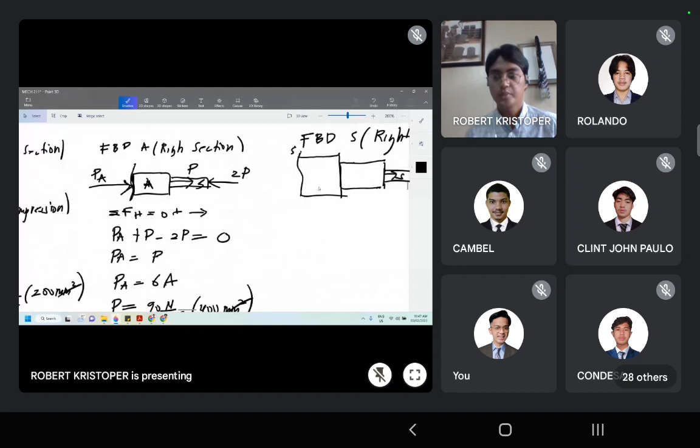Okay, so this is P. Again, this is an externally applied load P. And then, what else? We have this one at the junction between steel and aluminum.

We also have 4P. Okay? So that's 4P. 4P, then P, and then 2P.

Now, of course, when we do the cutting section, we will see the internal force acting at this particular section. Then that will...

Meaning the resultant is slightly going to the left, so the internal force here will react going opposite and with the same magnitude.

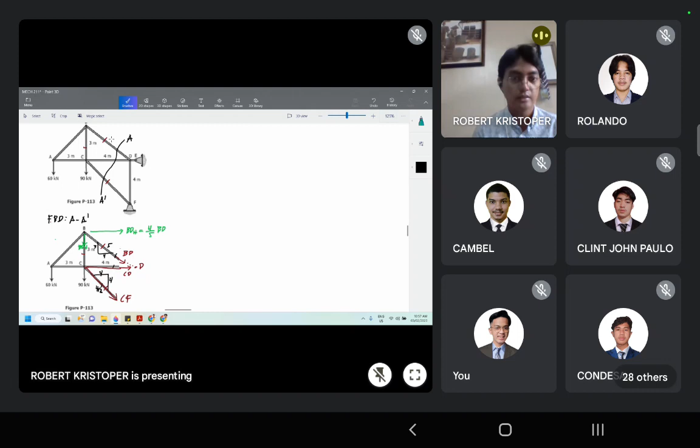And on this first member, this is BD. The slope triangle will be 3, then the dimension is 4 horizontally. So it's a 3, 4, 5 slope triangle. Now, member BD is coming from joint B and member CF is coming from joint C, that's why the components come from there.

Now, taking summation moment about point D, equal to 0, positive going clockwise. The forces that have a moment effect about point D are 60, 90, and CF. Let's start with 60 — it will rotate counterclockwise, so that's negative 60 times the moment arm going to point D. What is the moment effect of 60?

Plus, what is the moment arm at point D? Anyone? The moment arm is 7, sir. That's right, 7. Okay class, let's just follow this discussion so we can go fast.

So that will be negative 60 times 7. Then for 90, that will be negative 90 times its moment arm from point D, which is 4. Then for member CF class, there's a horizontal and vertical component, but as you can see, the horizontal component of CF will pass through point D, so it has no effect. So what we're left with is the vertical component of CF, which represents 4 divided by 4 square root of 2 times CF.

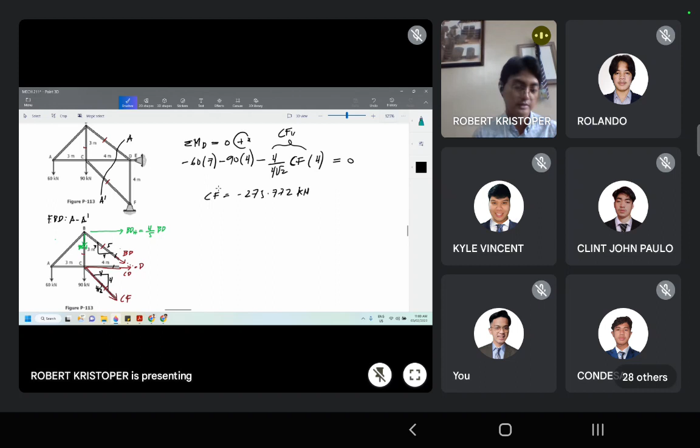Computing for CF gives negative 275.772 kilonewton. Since it came out negative, the correct direction should be the opposite, so that should be compression. So CF is equal to 275.772 kilonewton, compression.

Okay, now to get the stress formula here, force over area, P all over A. So that will be what? 275.772 kilonewton divided by the given area, parehas naman silang 1,600 square millimeter.

Sir, ask ko lang po, bakit po hindi sinama yung sa B, yung mga unknowns po na nandoon? Okay, hindi siya sinama dahil itong member BD, this will pass through point D, so meaning wala siyang moment effect. Hindi mo siya i-consider on this case kasi kung kinonsider mo itong original force member BD going to point D, then wala yung moment effect.

So you have to disregard this component, kahit yung horizontal, sir. Wala siya, buburin ko muna para hindi ka malito. Class, imagine wala pa siya, originally wala pa siyang component. Takpan mo yan, wala yan din. Pag nag-moment at point D, lahat ng forces here, BD and CD will pass through here, so ang may moment effect lang would be itong CF vertical, and even C horizontal wala.

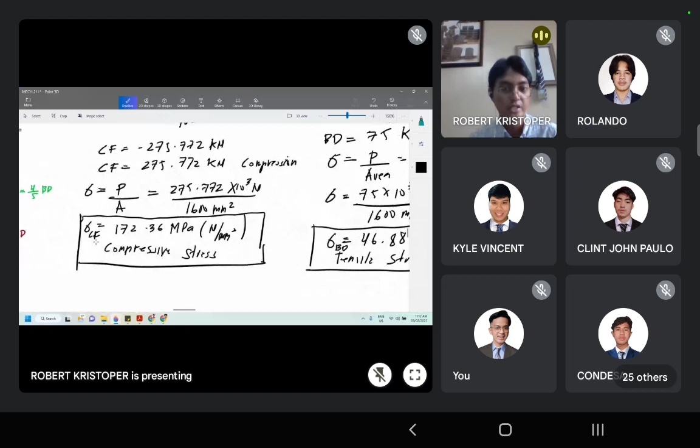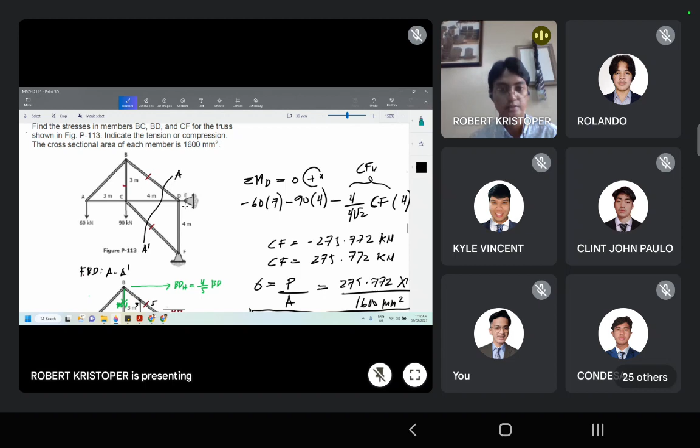Okay, so this is the last problem, but I have a conclusion. If you notice, class, the one experiencing the highest stress is member CF. Why is that? If you notice here in our structure, this is member CF, and this is the support. If you analyze the mechanism of this load, it will almost bend or rotate in this motion. If you analyze that, it carries almost all the weight, this loading, and this is clearly subjected to compression. And that's why you'll notice it carries so much, because the forces being transferred to the other members are shared among these members here.

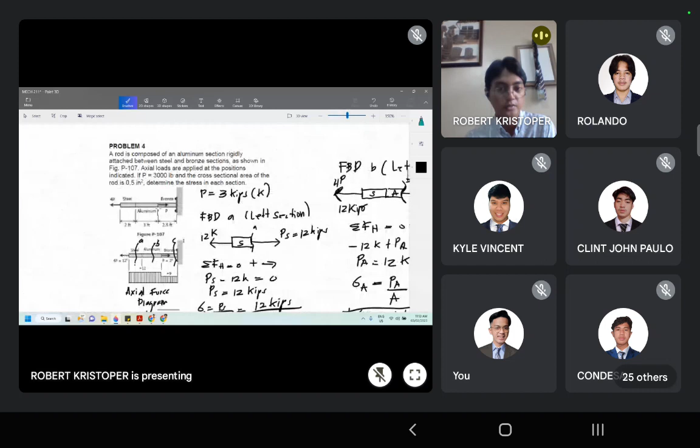Okay class, this concludes our meeting. Also class, take note that if you make this vertical instead, it's a similar application. If you tilt this bar, you would still need to produce a cutting section to compute the internal forces, and later compute the stresses.

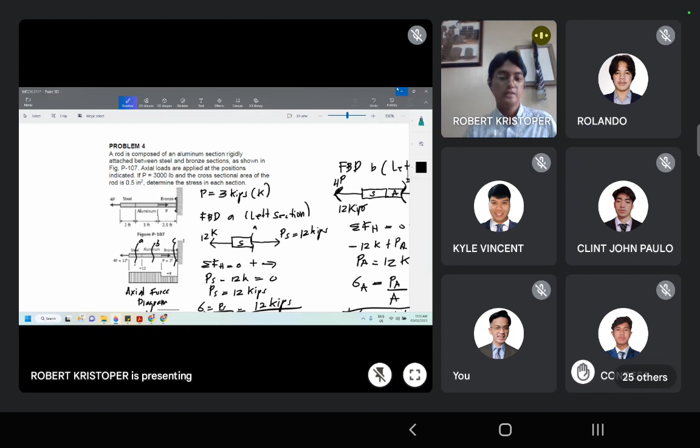Okay, go ahead. Do you have question or an attendance? Sir, yung ano po, yung sinolve po natin, i-upload niyo po yan sa Canvas.